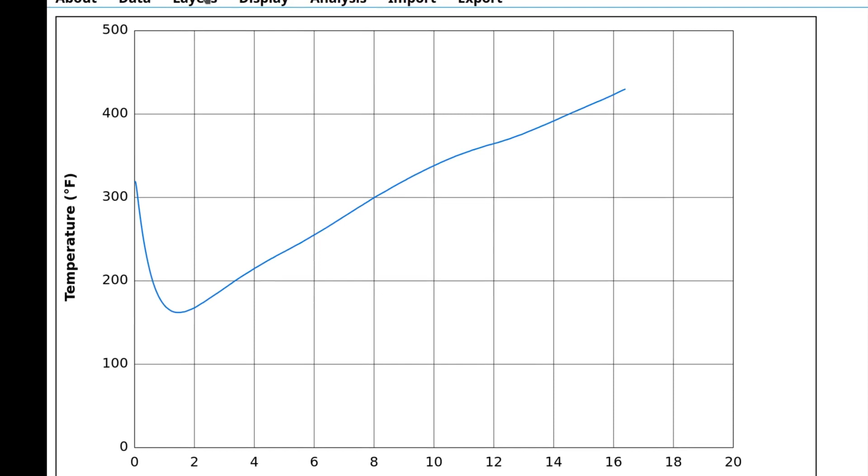This batch was a decaf Ethiopian coffee, not the one I have in the shop at the time of this recording. And if we look at the start of this, we can see that this starts out pretty slow. Low and slow is one of those classic pieces of advice for roasting decaf coffees, and it's one that I think is outdated for a number of reasons, especially if you're trying to do a high-quality decaf coffee, but it worked for what I wanted to get out of this one. I would say that even if you did want to do a low and slow, this is probably lower and slower than you really want for most coffees.

Then toward the end, I pushed this a little faster because this is a coffee that just opens up really nicely right at the start of second crack, and I didn't want to keep the slower pace between cracks as that would have made the coffee less vibrant, a little flatter than it could be. So, as always, there were sensory reasons why I went with this particular roast profile for this particular coffee. My current decaf Ethiopian is quite different, roasted both lighter and faster, but that's not the coffee I'm talking about today.

Now I'm going to go back to the import section and bring in another file representing a different roast of the same coffee. Once again, I'll go to the layers section to remove the air temperature, hide the rate, and I'm going to change the layer name on this one to fast. Now we can see that these look very different. The fast roast starts a little hotter, stays hotter throughout the roast, and while these are ending at about the same temperature, there's a pretty big difference in total roasting time.

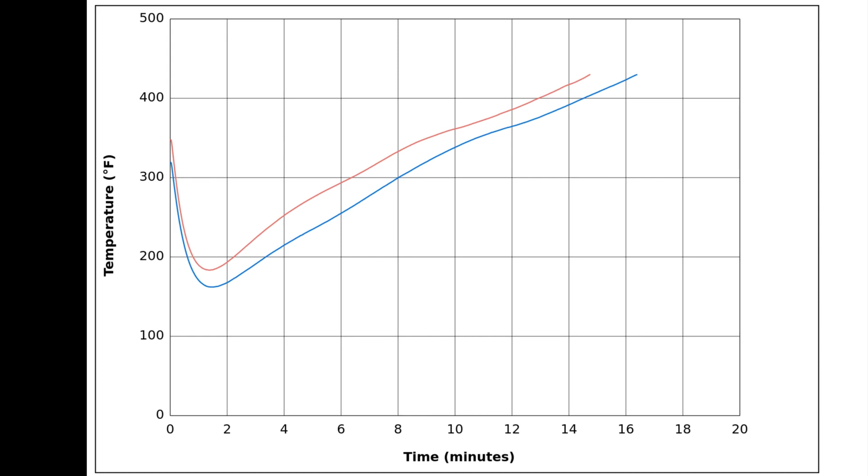So if you hit your first milestone early, you want the next one to also be early by the same amount and continue to stay early through to the end of the roast. If you let your batch data get closer to the plan, that's compensating for a difference in a range where the difference doesn't matter, with changes in a range where that change is more likely to produce a tasteable difference, which is not what we want to do.

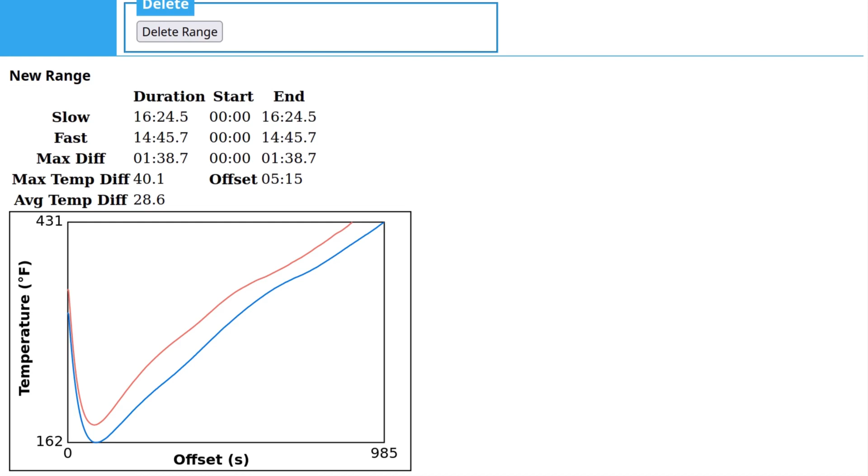Let's switch to the analysis section and see how I did at that. The default range is just the whole roast from start to end, and we can see some statistical information. The farthest apart these batches get are a little over 40 degrees, 5 minutes 15 seconds into the roasts, and the average difference is a bit under 30 degrees. But that's not very useful, so I'll change the range definition to something more interesting.

On a regular coffee, I'd have my color change from green to yellow consistently at 300 degrees, and that's conveniently also where we start to get chemistry that's responsible for tasteable changes. I'll also change the range name to something more descriptive. Now the two data series show up almost right on top of each other, and we can look at this data table to see what's going on here.

The difference in duration for this part of the roast is only 0.3 seconds, which is effectively the same. The largest difference is 1.4 degrees, but the average difference is only 0.7, so despite the huge early difference, where there's a difference of 1 minute 39 seconds before we get to the significant part of the roast, once we get to that part of the roast that matters, this looks like a very good match, which explains how both batches matched the flavor spec.

Well, there isn't much point to further breaking this down with batches that are matching up this closely. It can be useful to further dissect this if we had batches that were more different or where there was a tasteable difference between the batches. This is also useful when trying to do roasting exercises where maybe you want to change a range in the middle of the roast, but want to keep everything before and after that intended difference the same.

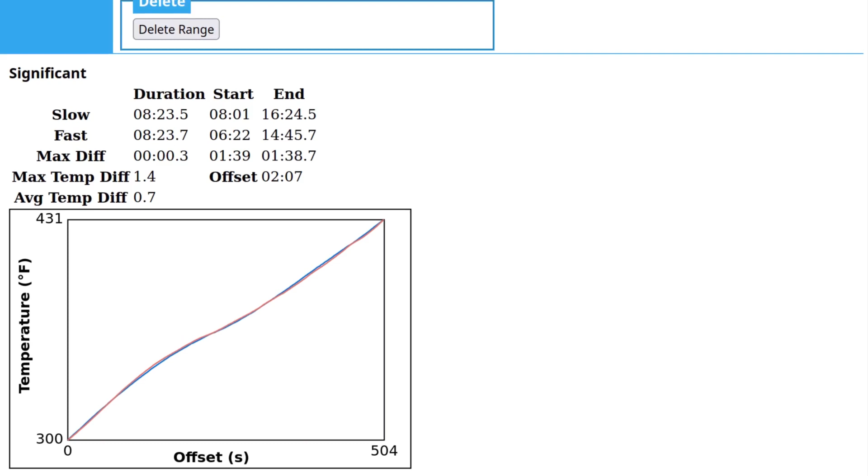You can use multiple ranges to confirm that you have close matches in the parts of the roast you're trying to keep the same, and differences only in the parts of the roast where you wanted those differences. I'll just go ahead and create a few more ranges that I personally find useful to have to show how that works. Clicking New Range sets up a new range. I'll start with yellow.

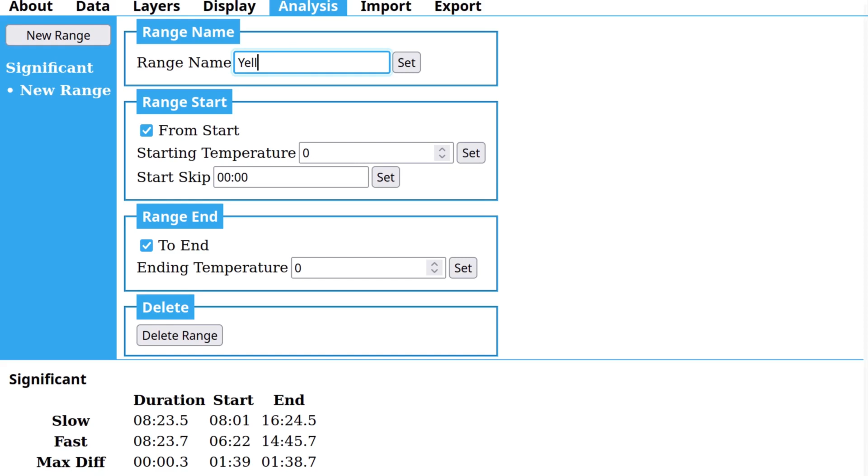The same starting temperature of 300 degrees. And I'll set an end temperature of 330 degrees. Another new range. Let's call it brown. And we'll take the 330 as our start this time and go out to start of first crack, which on my machine happens consistently at 380 degrees.

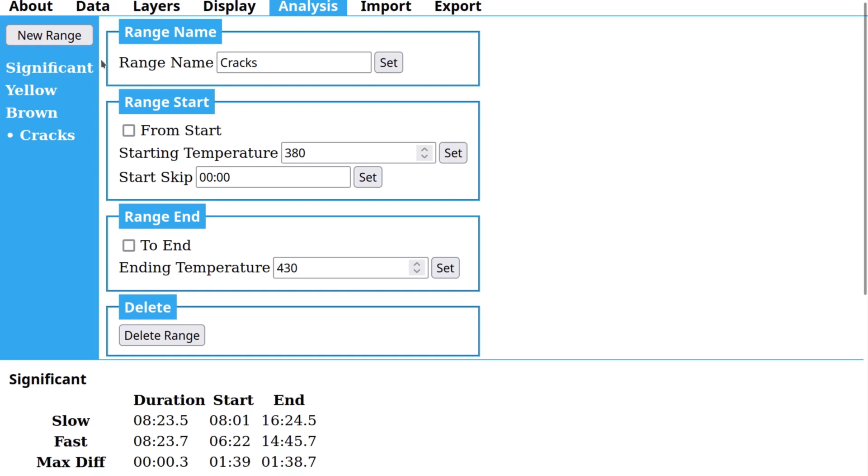Then we'll go with a range for between first and second crack. So our 380 is our start temperature. 430 is the end of the range. And we'll do one more, which won't be very interesting for these particular batches, but I think it's useful to treat everything after second crack as its own separate range. So on my machine, second crack starts at 430 degrees, and we'll let that run to whatever the end of the roast is.

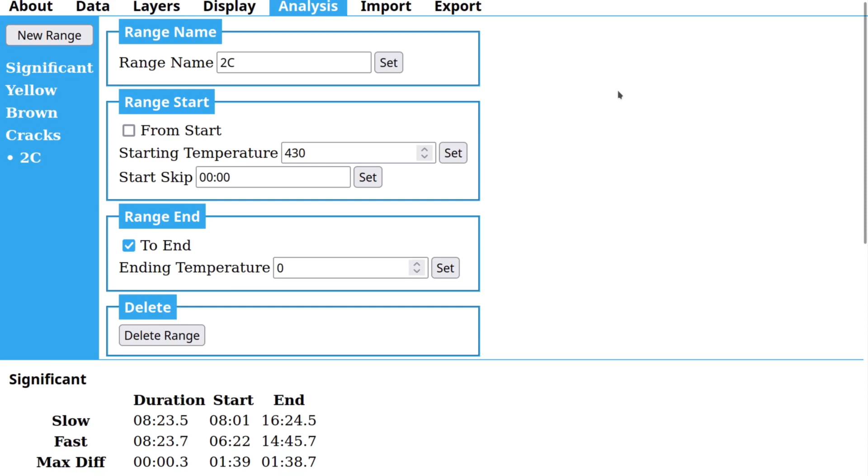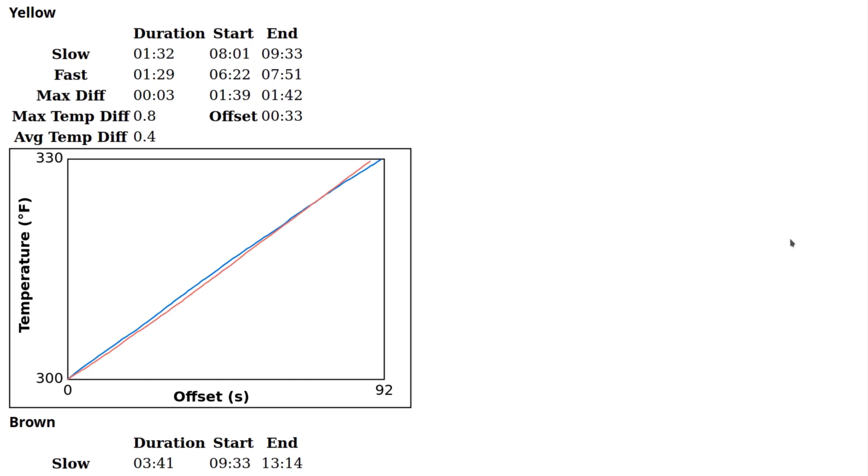Now if we scroll down, we can see those other ranges. Recall that the blue line is the slower roast, and the red line is the faster roast, and we can see that the fast roast is getting into yellow a little slower, but pulling ahead by the end of the range. It's important to keep in mind that we're really zoomed in on a small piece of the roast. The difference in duration within that range is only 3 seconds, and we're always under 1 degree difference.

Brown is a little closer, only 2 seconds difference in the opposite direction, and you can see that the lines are almost perfectly on top of each other for most of the range. Between cracks, we see a little more of a difference, on average 1 degree difference, only 1 second difference in duration, but the faster roast stays a bit below the slower roast.

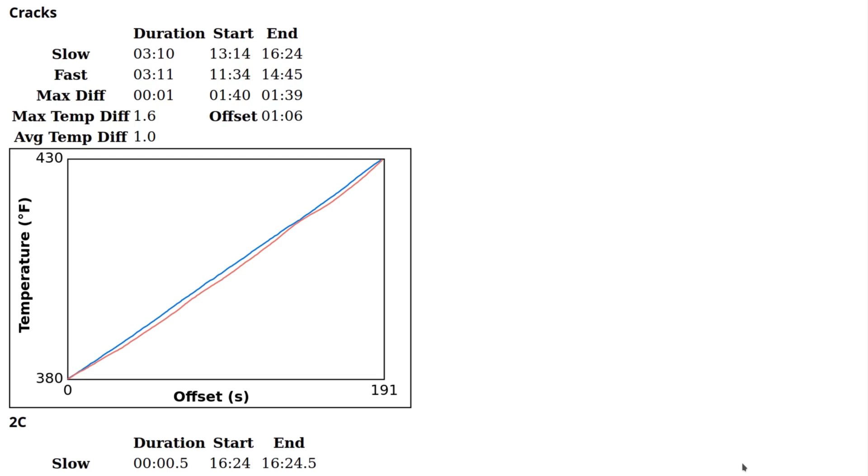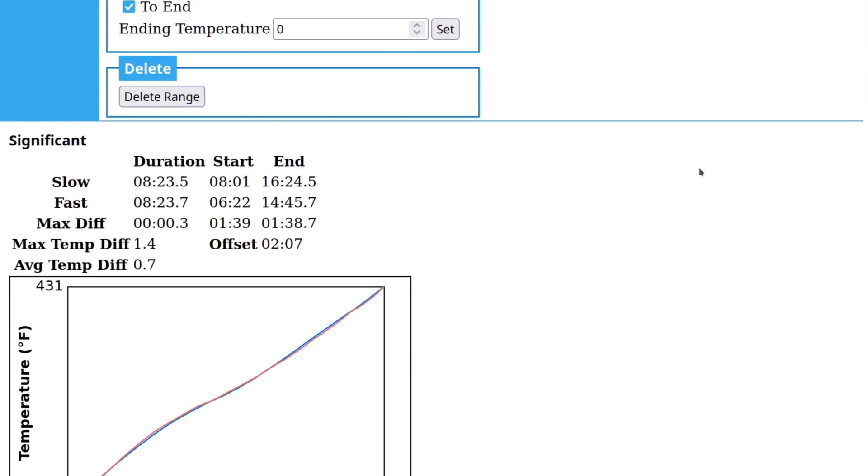You can see that the max difference here is a little higher than the max difference for the full significant range from yellowing to the end. That's not uncommon to see because we're dealing with different offsets in these two views. And then since we're stopping right at the start of second crack, there isn't anything useful to see there for these batches. All of those range definitions get saved, so you only need to set up the ranges you're interested in looking at once, and those will be ready the next time you want to use this feature without needing to do that setup.

This kind of profile translation analysis is a powerful tool for more accurately connecting differences in observed flavors with differences in how those batches were roasted, or for setting appropriate tolerances for how far off you can get in different parts of the roast while likely getting close enough results in the cup. This should never be used to replace tasting the coffee, but it's incredibly useful for contextualizing what you're tasting and connecting those observations with your roasting data.